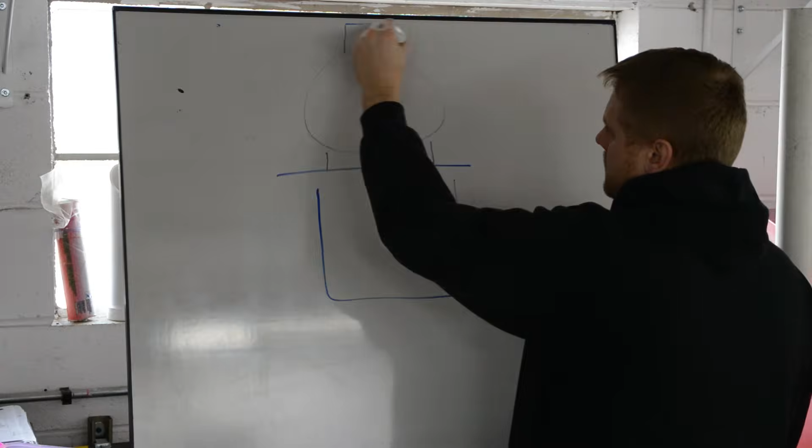Okay, but let's quickly draw a carburetor. That's a sorry looking carburetor, but anyway. Okay, so fuel level,

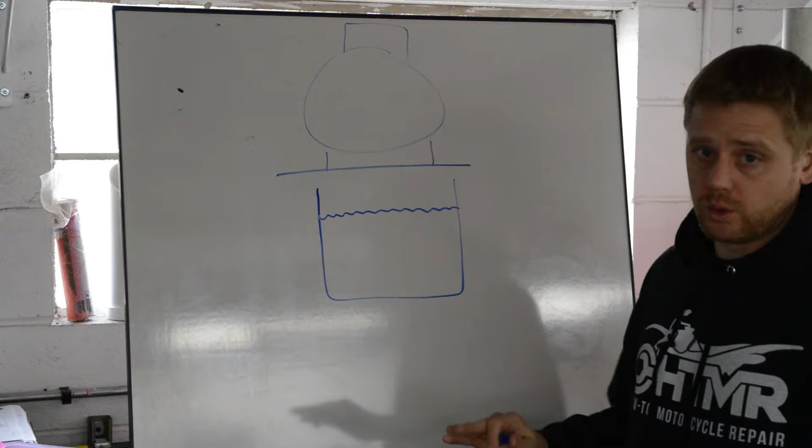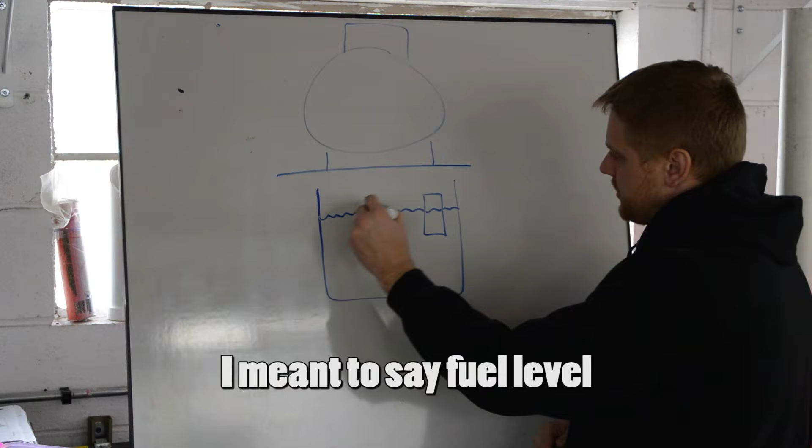there's some level of fuel that is required by the carburetor manufacturer. So this is the fuel level, and then the float height is basically, here's your float in here, and here's your pivot point. Okay, so the float height is measured from here to the gasket mating surface.

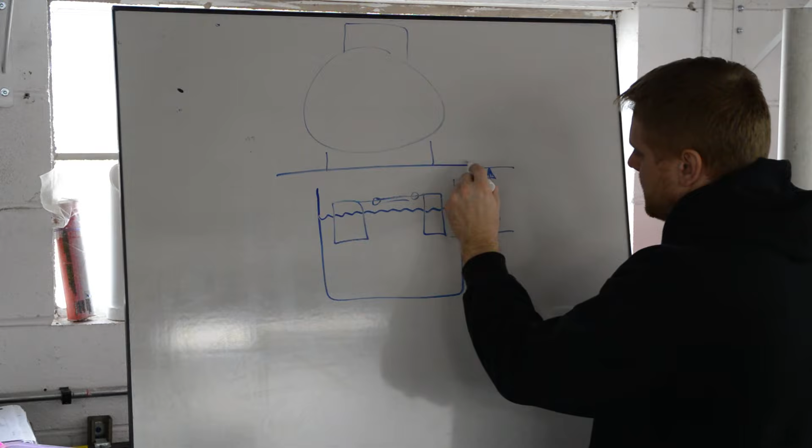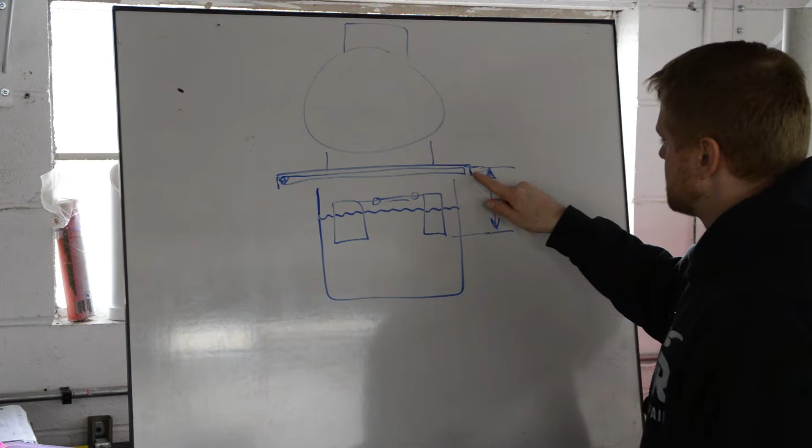Always to the gasket mating surface. Now the carbs I'm working on, the CB750 carbs, it had in the manual, it measured it to like a ridge. So the gasket actually sits like in here. Okay, so clearly in the service manual, it wanted it here versus the gasket mating surface. So that's why I'm doing the clear tube method to just check and make sure I'm good. But anyway, so that's the float height.

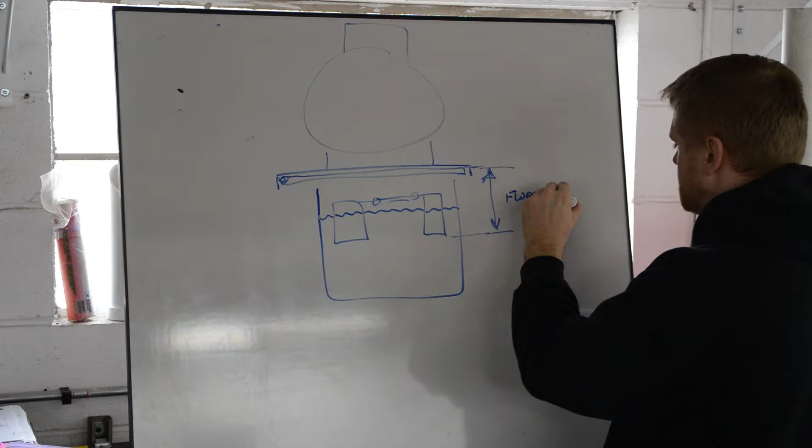And it's usually measured with the carburetor upside down. I'll show you in the video. But the fuel level should always be 1 to 2 millimeters below the gasket mating surface.

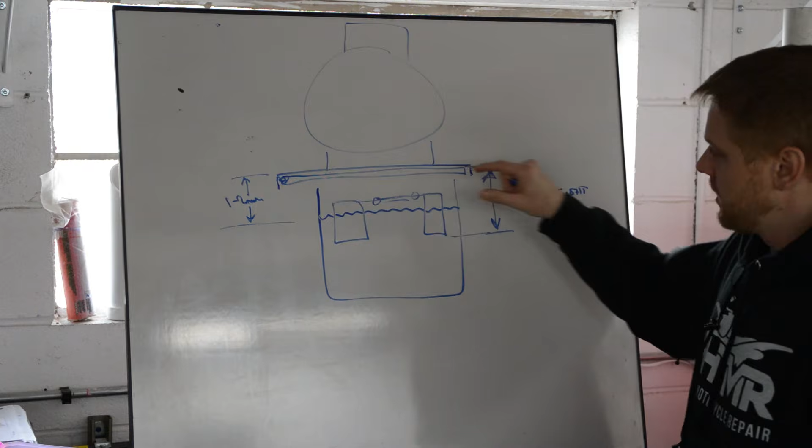Okay, so let's say you adjust the float, then you do the clear tube method. This is where your fuel level should be.

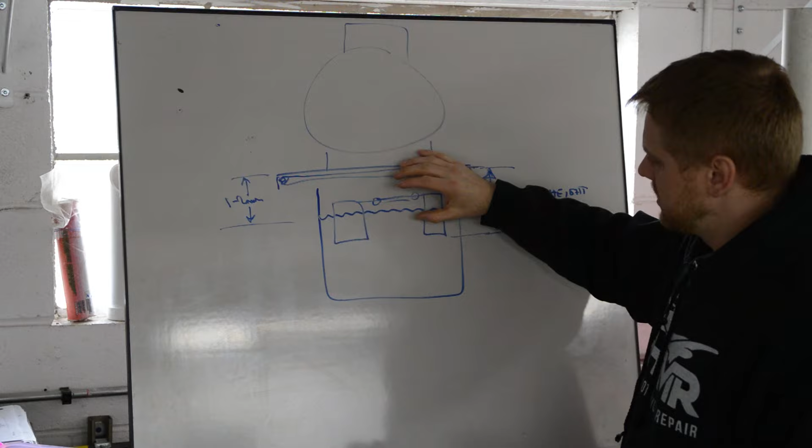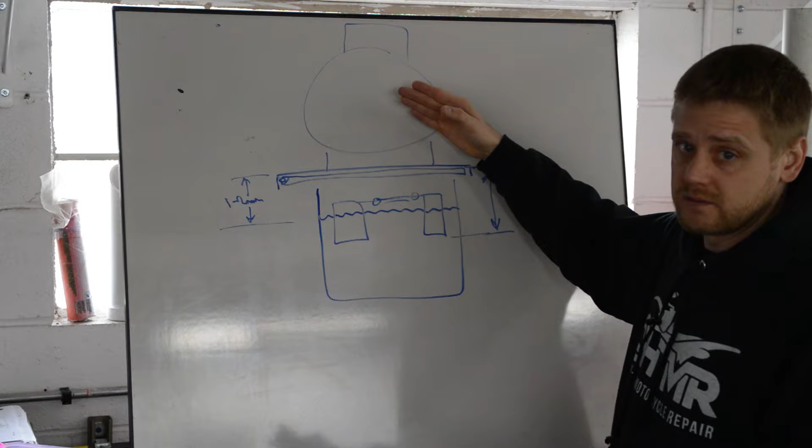Now, what happens if your fuel level's too high or too low? Well, since this is drawn in by vacuum or a pressure difference, if it's higher, it's easier for the fuel to get sucked into the engine, so it could technically run richer. If it's lower, it could run leaner, okay?

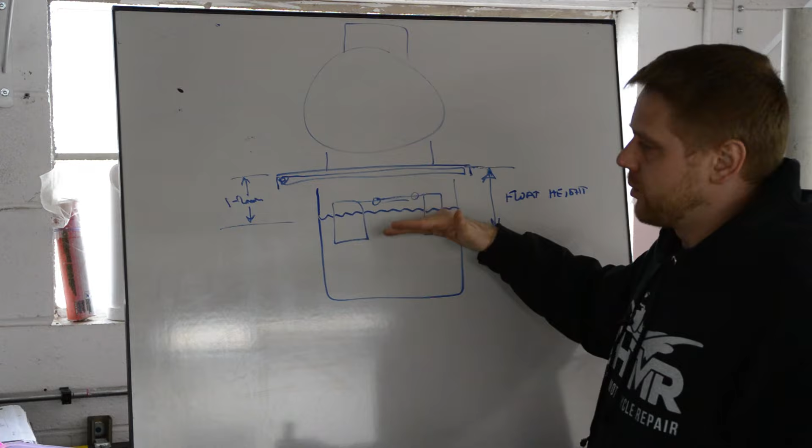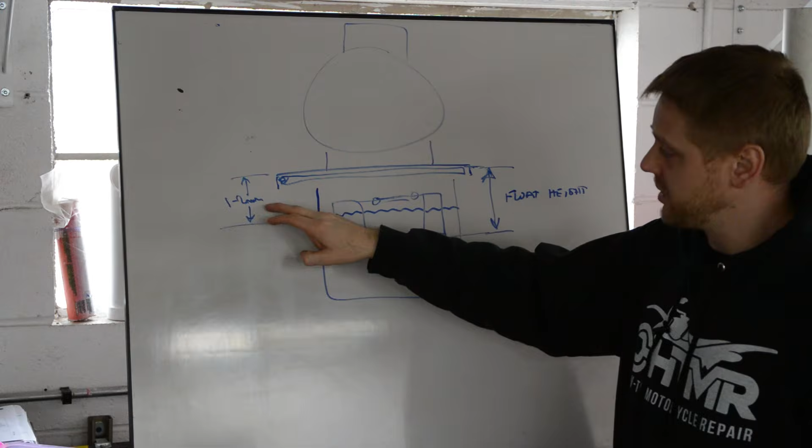I hear people messing around with float height to get things to run right or whatever. I usually set it to what the factory recommends or the service manual recommends, and I ended up here. I never have to touch it. I don't ever fuss with this or alter it to get a desired outcome. I just never do that.

Okay, so here's, let me erase that. All right, so here's the clear tube method. Most carburetors have a drain screw, or there might be an overflow tube in here. You know, the overflow tube comes something like that. I'm just drawing the channel here.

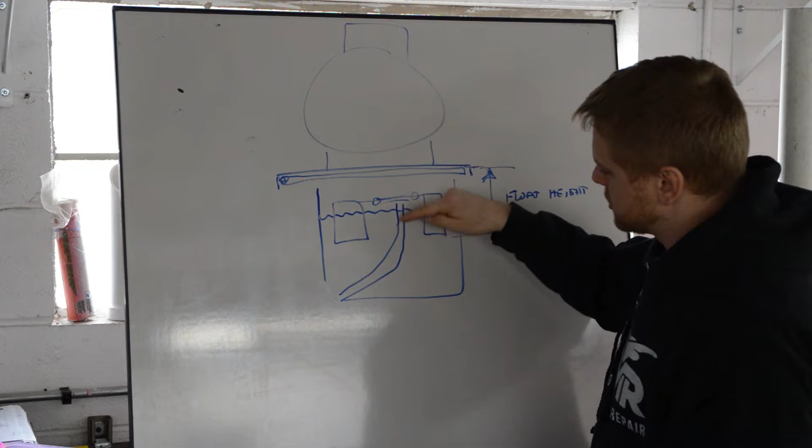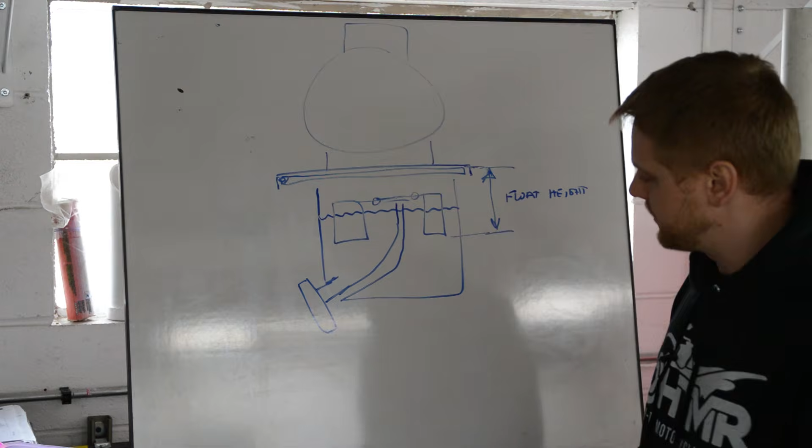If the float level's too high, the fuel level's too high, it'll trickle down and out into the ground or whatever. But anyway, some carburetors have a screw right in here, right? So if we take the screw out, let me just get rid of this overflow tube. We don't need it for this example.

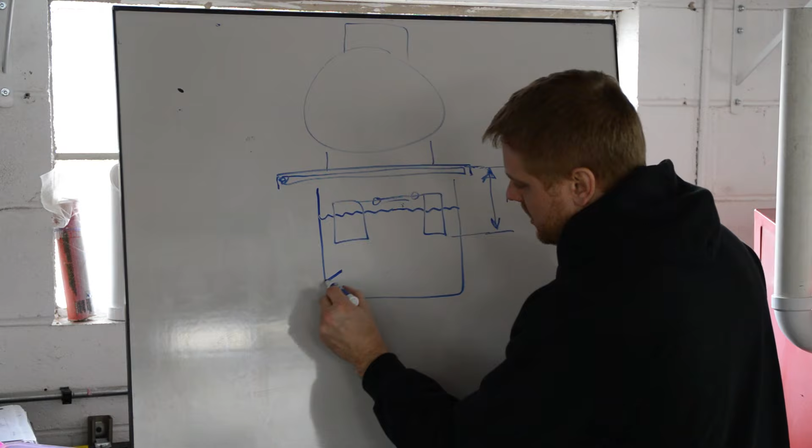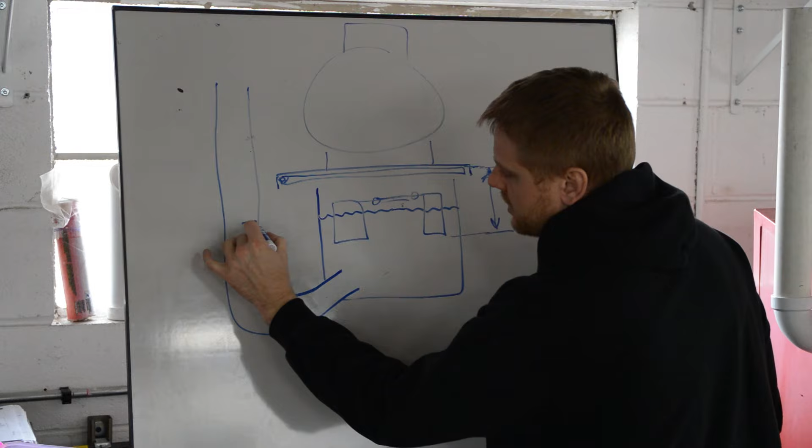Okay, if we take that out and we jam a hose in here and just have a hose leading up like that, it will also fill with fluid or fuel to the level, right? It's going to just drain in here and go to the same level. So then we can visually inspect it outside the carburetor. We just go like this, and it should be 1 to 2 millimeters. Okay, so I'll show you how to do that.

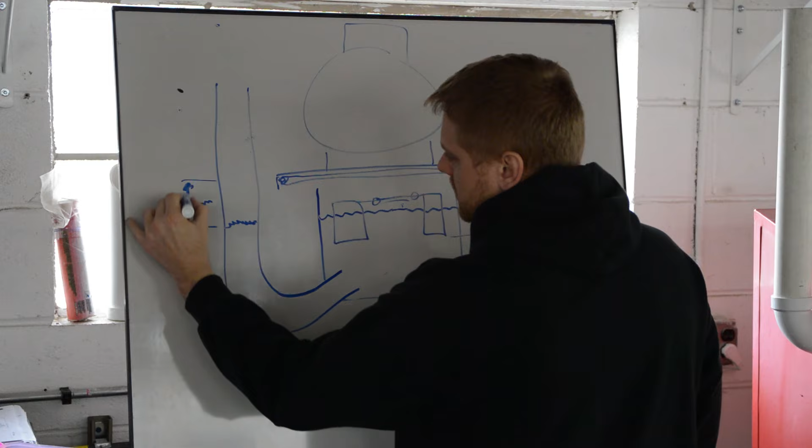Okay, so let's go over to the bench. We'll first adjust it, and then we will check it with this, and that's pretty much it.

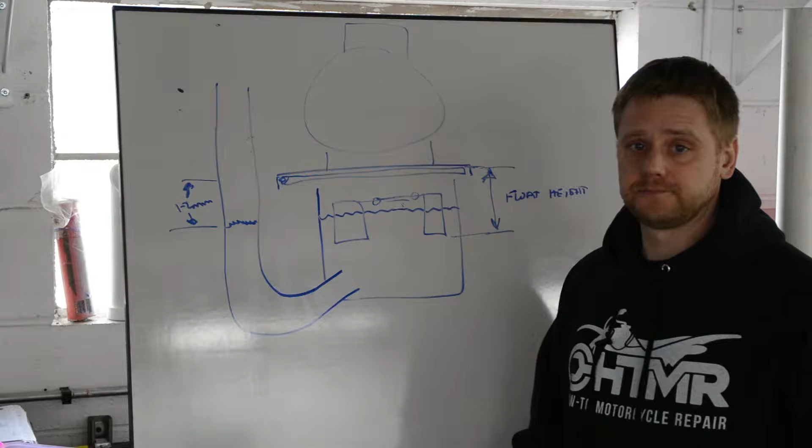Okay, now to check the float level. Now, if you look at it in the manual, it looks like they're using this surface here with the cutout. So from this surface right here to the top here, it's supposed to be 26 millimeters. Now, normally it's to the gasket mating surface, so it actually would be the surface here. But you can clearly see that they're using this surface in the service manual.

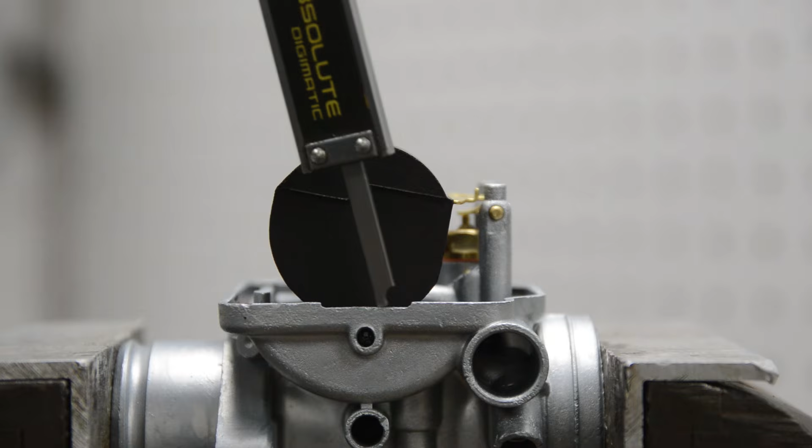Okay, so let's go ahead and check this. All right, camera's in my way here a little bit. Okay, so it's a little high. So what I have to do is bend the tang a little bit, which you can see right in here.

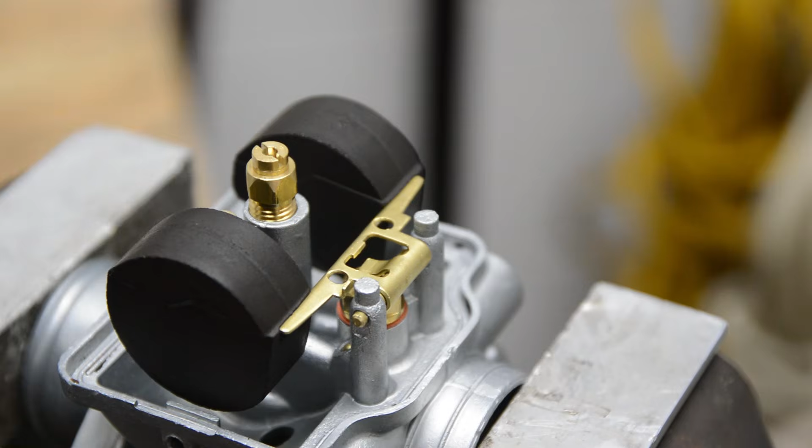So what I'm going to do is I'm just going to stick the screwdriver in here. Actually, let me get a better camera angle so you can see what I'm doing here. Okay, so the float has to come down a little bit, so this tang has to come up. So if you take a skinny screwdriver, just come in here and gently pry that guy up.

Okay, so let's see where we're at. Okay, I just went a little too much. And it looks like the float is a little crooked. What you can do is I'm going to push this one down and this one up. You know, these things get all jacked up over time.

Okay, I'm just hitting this one. This one needs to come up a little bit. I am very close to that one. And this one I'm like dead nuts on. Okay, so I'm going to leave that there. So you have to manipulate that tang in order to get the right float height.

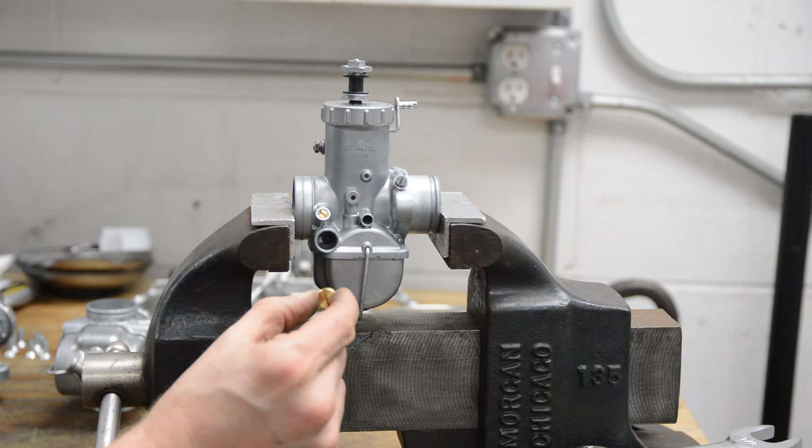Okay, so what I've done now is we got the carb in a vise. It's level. I removed the drain screw or plug at the bottom here. I got a piece of hose here that I can see through. I nipped it to a point, and what I'm going to do is I'm just going to jam it in these threads here, okay? And hopefully it won't leak too bad.

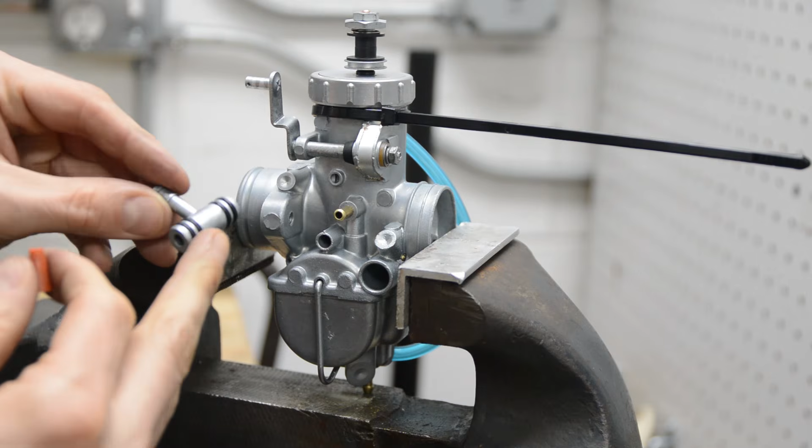All right, and then what we'll do is we will just hold it. Will it stay? All right, so we'll be able to see the fuel level there. Okay, on this side here, I got the fuel joint T. We'll push that in, and then I got a little silicone plug that will just plug right there, and then we will hook up a fuel tank to that port there.

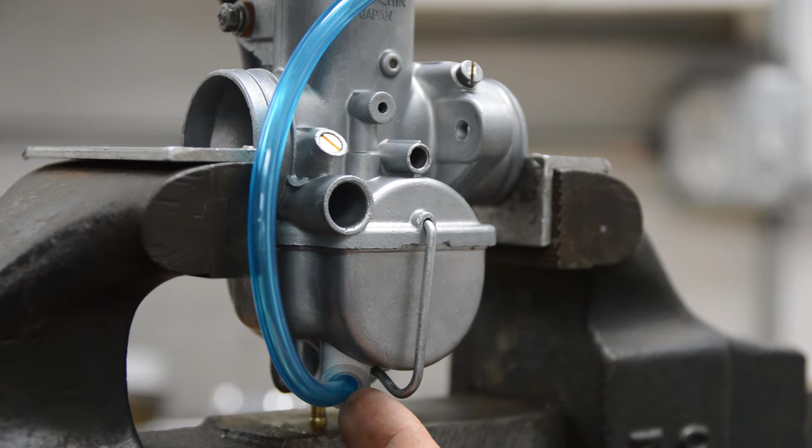All right, so here's my fuel tank. I'll just slide this guy on here. All right, so when I open the fuel, you're going to see the fuel level come up, and it's going to stop, and we'll record where it is.

All right, my freaking on-off valve here is leaking like crazy. We are right there, so we're about a millimeter or two below the gasket surface. This fuel here is because this thing's freaking spilling all over the place. But anyway, so that's good. That's where we want to be, about 1 millimeter to 2 millimeters below the gasket surface. That's normally where a float level should be.